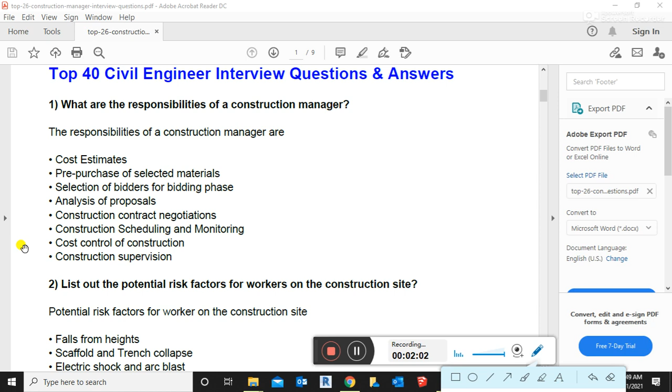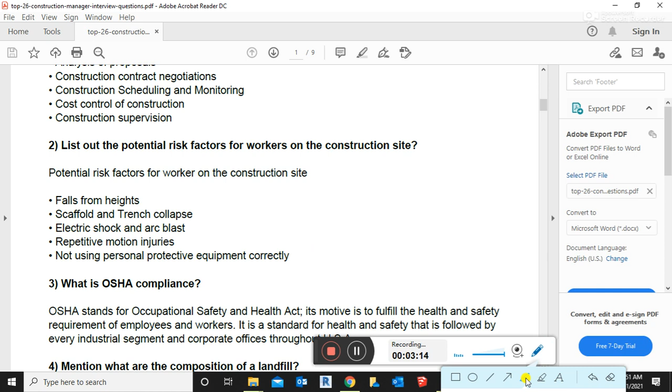Question number 2, guys: list out the potential risk factors for workers on the construction site. Potential risk factors for workers on site: falls from height, scaffolding and trench collapse. Sometimes scaffolding is made for plastering, second floor brickwork, or casting of slabs on walls above 3 meters. We just arrange some scaffolding - if it is not safe, then it is a major risk. Electrical shock and arc blast, repetitive motion injuries, not using personal protective equipment correctly - also called PPE, personal protective equipment. This is very important in the civil industry, construction industry, guys.

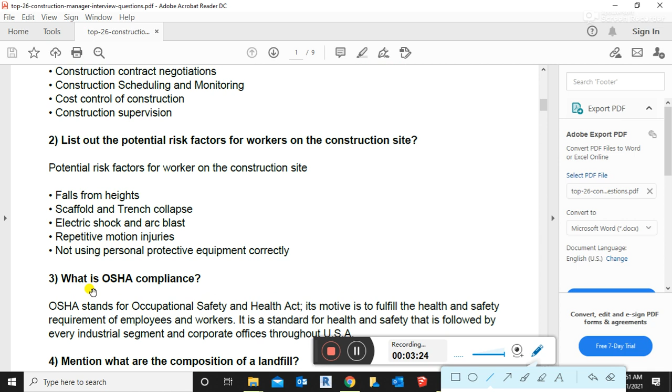Third question: what is OSHA compliance? OSHA stands for Occupational Safety and Health Act. This is very important - we should know the full form of these words. OSHA stands for Occupational Safety and Health Act. Its motive is to fulfill the health and safety requirements of employees and workers. It is a standard for health and safety that is followed by every industry segment and corporate office throughout the USA.

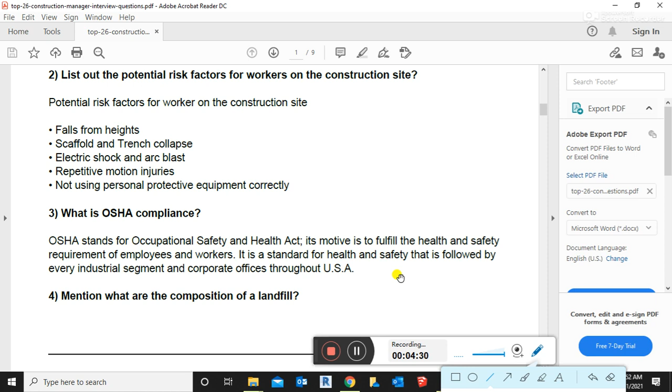Guys, I also faced the same question in the exam, an interview question about OSHA. The hiring manager and construction manager all asked me about OSHA - what do you know about OSHA, Occupational Safety and Health Act? We should know some words, some sentences about this. This is an important question, guys.

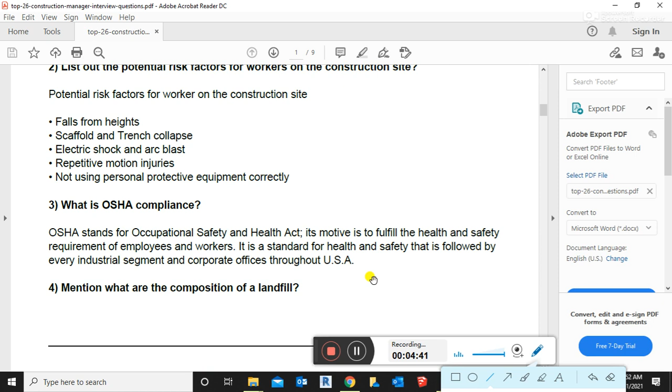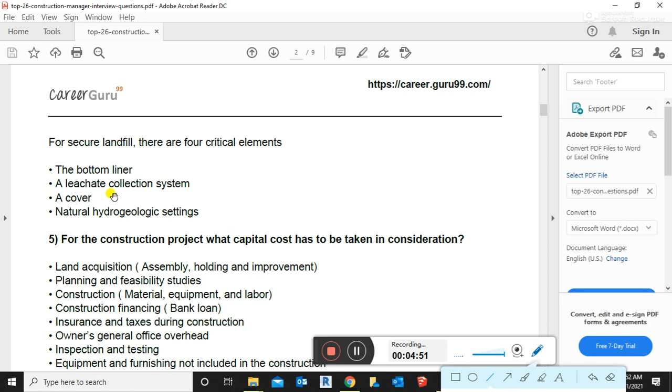Question number 4: mention what are the composition of the landfill. For a secure landfill, there are 4 critical elements: the bottom liner, the leachate collection system, a cover, and a natural hydrogeologic setting.

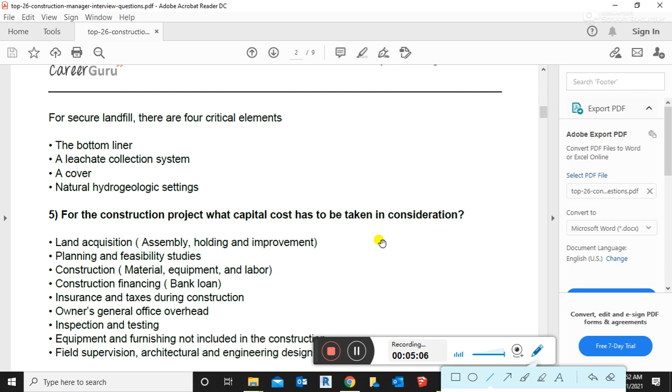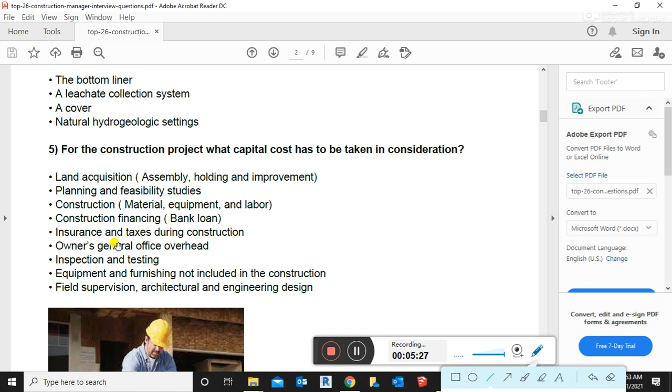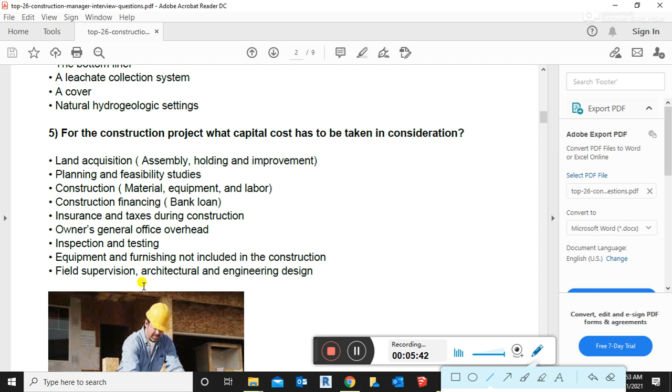Question number 5: for the construction project, what capital costs have to be taken into consideration? Capital cost includes: land acquisition, assembly, holding and improvement, planning and feasibility studies, construction material, equipment and labor, construction financing, bank loan, insurance and taxes during construction, owner's general office overhead, inspection and testing, equipment and furnishing not included in construction, field supervision, architectural and engineering design. These are the factors, guys.

Question number 6: list out some of the software used in the construction sector to estimate cost and monitor expenses. Guys, believe me, I also faced this question in the exam. Every civil engineer should know these types of questions - these are very basic questions. Every civil engineer should know these questions. This is very important, most important question.

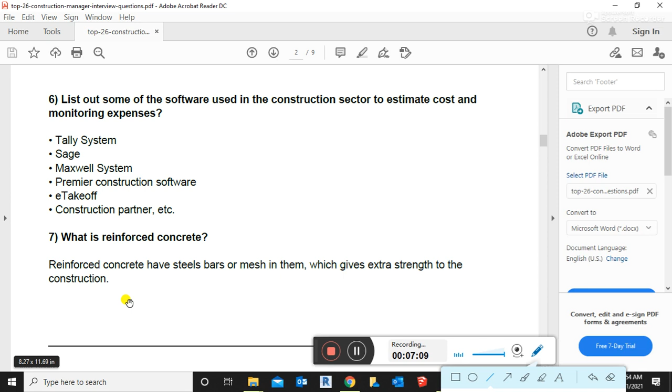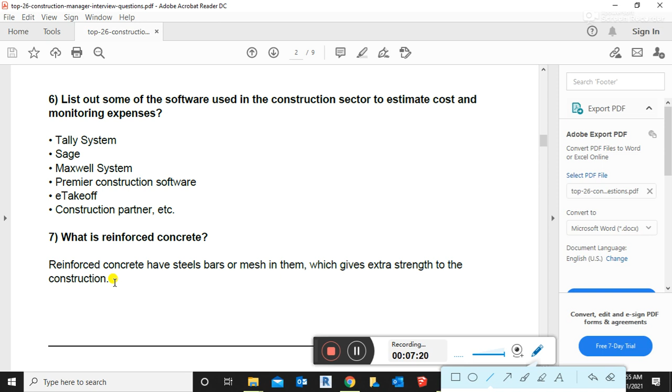What is reinforced concrete? This is a most important question, guys. Reinforced concrete has steel bars or mesh which gives extra strength to the construction. Concrete is most strong in compressive strength, but steel is mostly strong in tension. Guys, most important question - concrete has compressive strength and steel has tension strength.

Next question: what are the different types of foundation? There are 3 main types of foundation. Basement: it is prepared first on top of which the building is constructed. Crawl space: a raised foundation built above the ground, allowing enough space to crawl underneath. Slab foundation: concrete is directly poured into a pit made in the ground. These are the 3 main types of foundation.

Explain what is a hybrid foundation. This is also a very frequently asked question in interviews and written exams, guys.

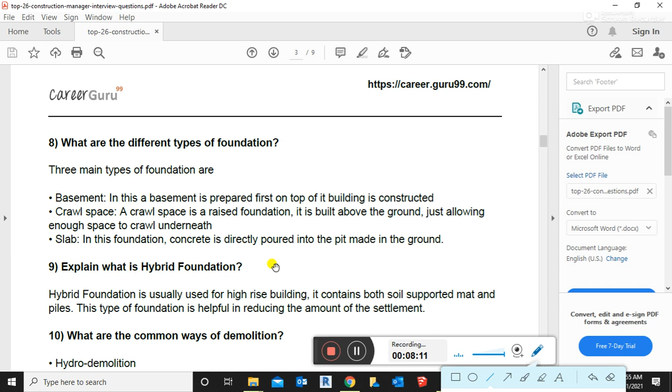Hybrid foundation is usually used for high-rise buildings. It contains both soil-supported mat and piles. This type of foundation is helpful in reducing the amount of settlement.

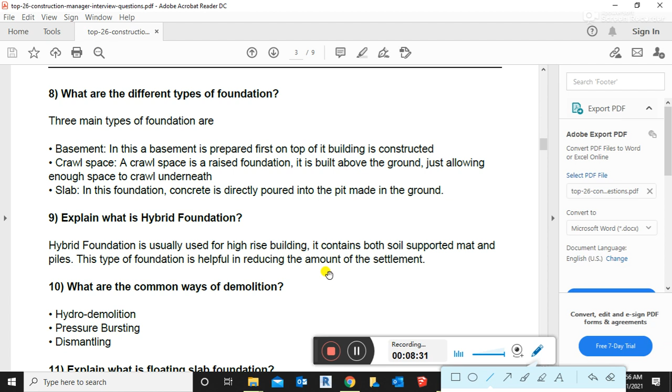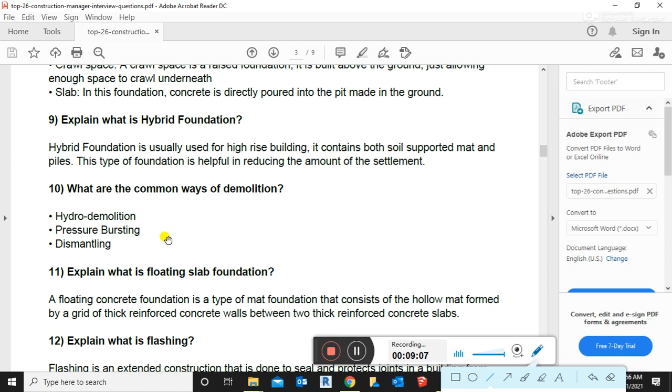Number 10. What are the common ways of demolition? Hydro demolition, pressure bursting, dismantling. For demolition or dismantling, it's a technique to destroy a building, high-rise building, or any type of construction elements. There are 3 types of demolition: hydro demolition, pressure bursting, and dismantling. These are the 3 types of demolition, guys.

Explain what is the floating slab foundation. A floating concrete foundation is a type of mat foundation that consists of a hollow mat formed by a grid of thick reinforced concrete walls between two thick reinforced concrete slabs.

Explain what is flashing. Flashing is an extended construction done to seal and protect the joints in the building from water penetration. Flashing is installed at the intersecting roofs, walls, and parapets.

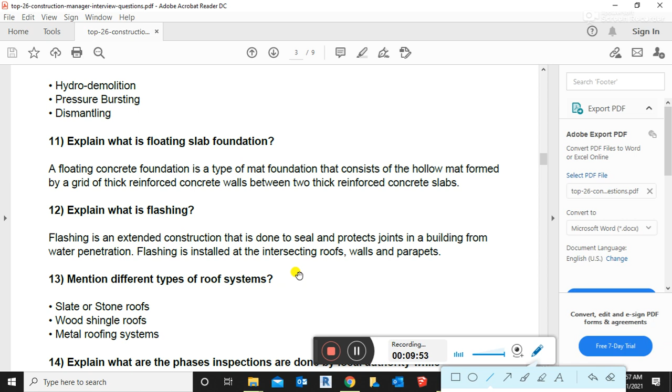13. Mention different types of roof systems: slate or stone roof, wood shingle roof, metal roofing system. These are the three types of roofing, guys.

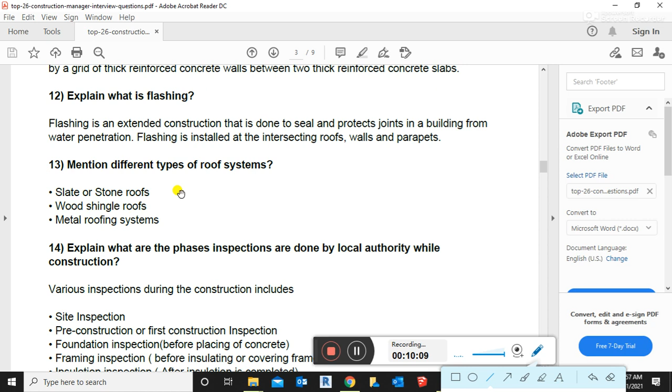Most important question. Explain what phases of inspection are done by the local authority during construction. Various inspections during construction include site inspection. This is also a very important question, guys. Site inspection, pre-construction or first construction inspection, foundation inspection before placing of concrete, framing inspection before insulating or covering frame, and insulation inspection after insulation is completed.

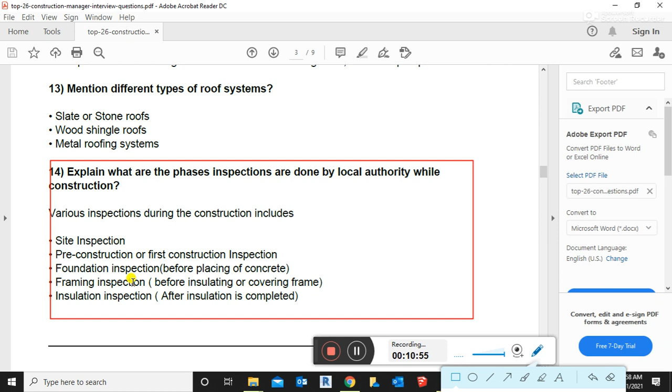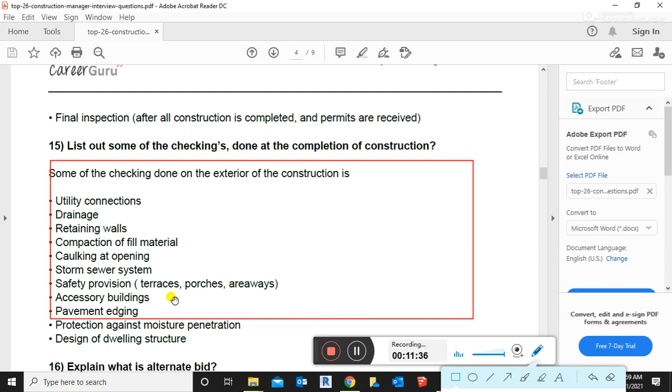Question number 15. List out some of the checking done after completion of construction. Some of the checking done on the exterior of the construction includes utility connection, drainage connection, retaining wall, compaction of fill materials, caulking at the openings, storm sewer system, safety provisions, accessory buildings and pavement edging, and protection against moisture penetration, design of the dwelling structure.

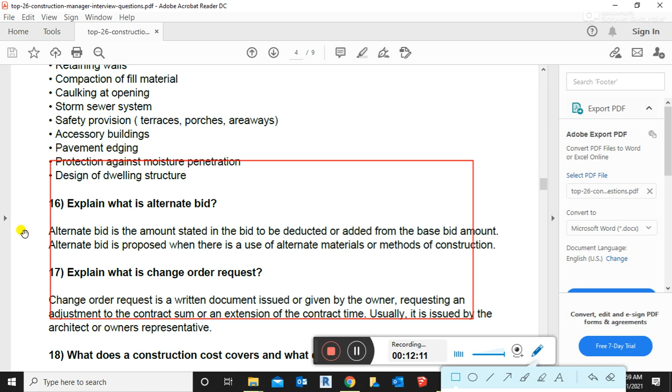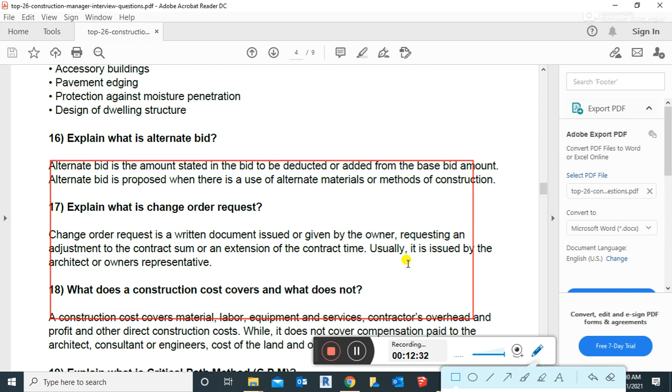Question number 17. Explain what is a change order request. Change order request is the written document issued or given by the owner requesting an adjustment to the contract sum or extension of the contract time. Usually it is issued by the architect or owner representative.

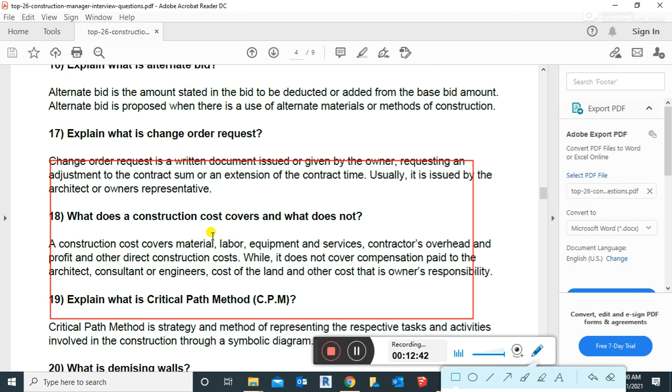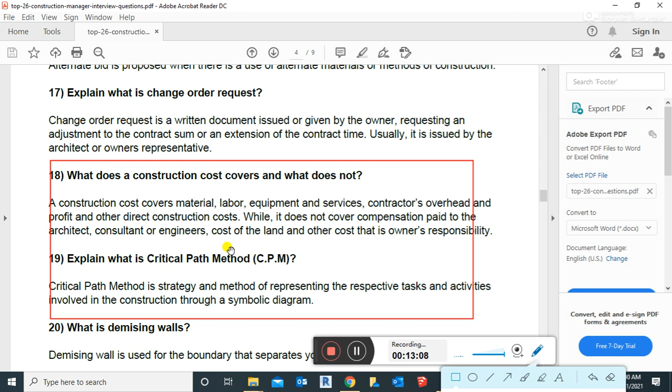What does construction cost cover and what does not? Construction cost covers materials, labor, equipment and services, contractor's overhead and profit, and other direct construction costs. It does not cover compensation paid to the architect, consultant, or engineers, cost of the land, and other costs that are the owner's responsibilities. Guys, this is a most important question.

19. Explain what is the critical path method, or CPM. This is a very important question. As a project manager or construction manager, we should know this. Critical path method is a strategy and method of representing the respective tasks and activities involved in construction through symbols and diagrams.

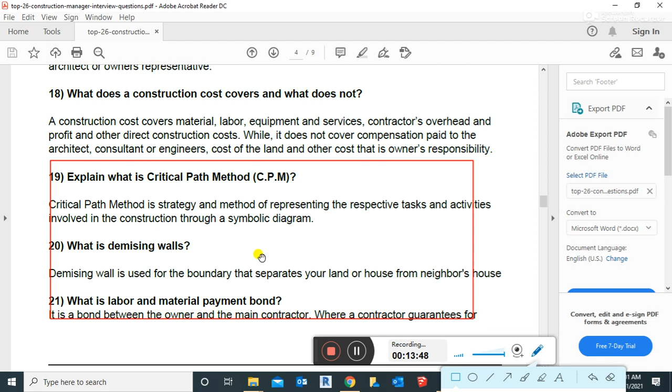What is the demising wall? The demising wall is used for the boundary that separates your land or house from the neighbor's house, called the demising wall.

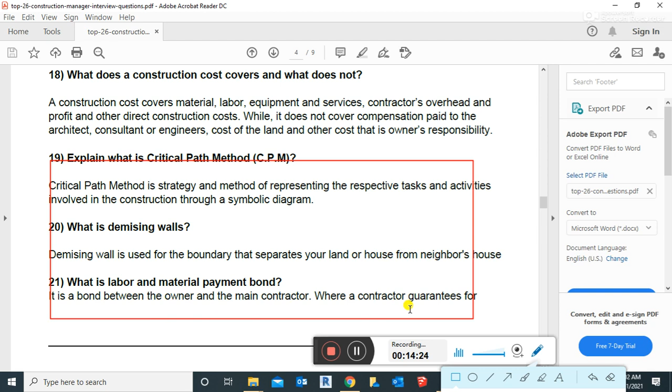Explain what is the structural frame or system. Structural frames are the load-bearing system assembly of beams and columns on the foundation. Normally, the columns and beams are generally prefabricated off-site and assembled on-site. Some of the elements of the building are prefabricated; once it comes to the site, then it's assembled on-site.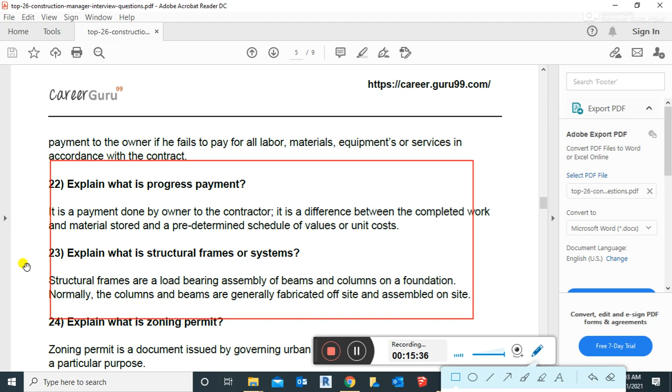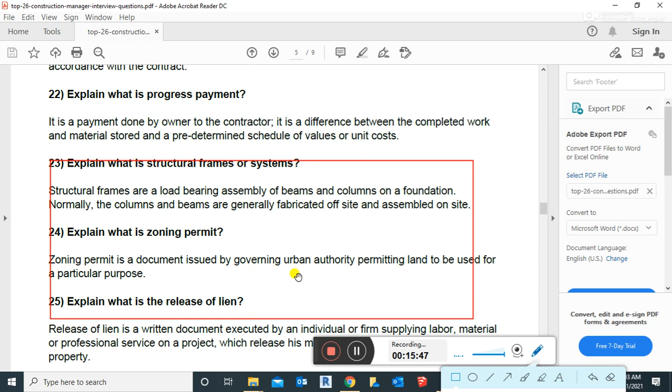Explain what is a zoning permit. A zoning permit is a document issued by a governing urban authority permitting land to be used for a particular purpose.

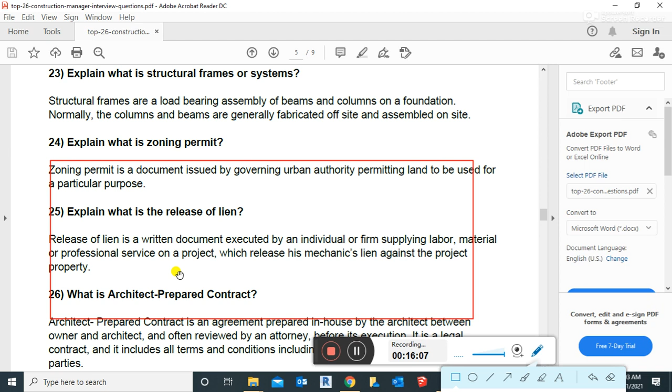Explain what is release of lien. A release of lien is a written document executed by the individual or firm supplying labor, material, or professional services on a project, which releases his mechanic's lien against the project property.

What is an architect-prepared contract? It is an agreement prepared in house by the architect between owner and architect, often reviewed by an attorney before execution. It is a legal contract, and it includes all terms and conditions including adequate legal protection for both parties.

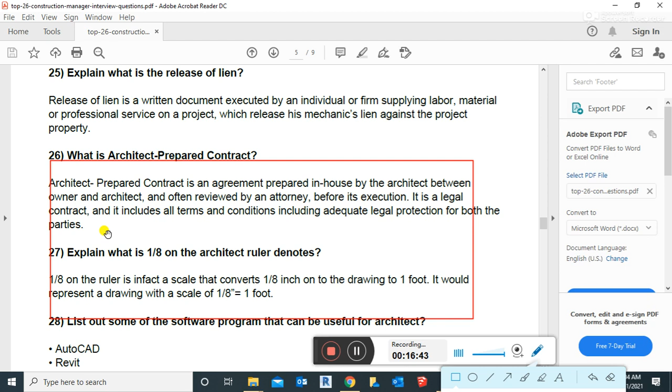Explain what the 1/8 scale on the architect ruler denotes. The 1/8 on the ruler is a scale that converts 1/8 inch on the drawing to 1 foot. So 1/8 would represent a drawing with a scale of 1/8 inch equal to 1 foot.

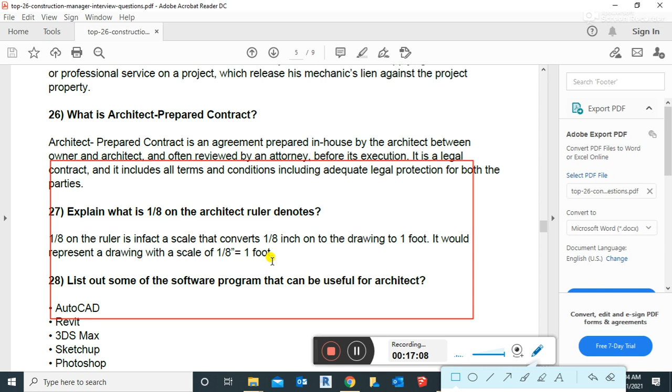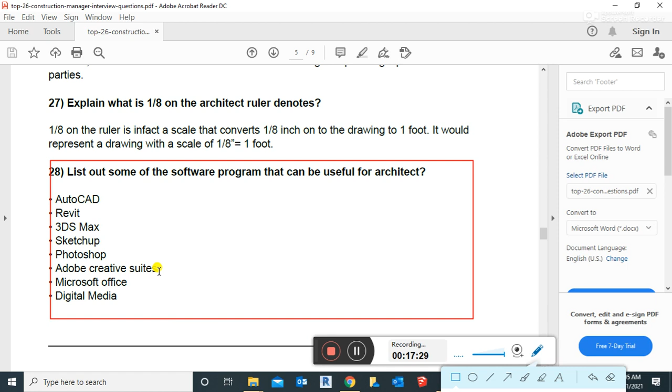List out some of the software programs that can be used for architecture. This is a most important question: AutoCAD, Revit, 3DS Max, SketchUp Pro, Photoshop, Adobe Creative Suite, Microsoft Office, digital media.

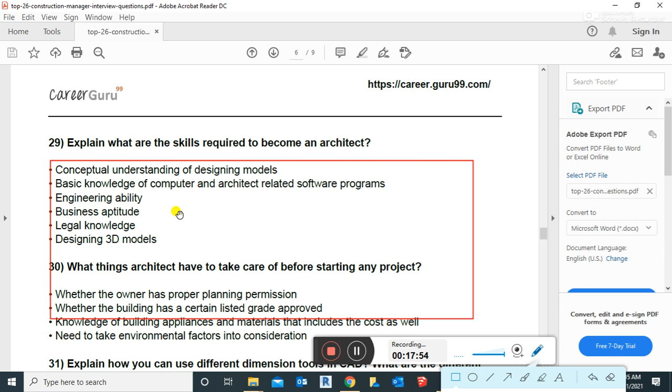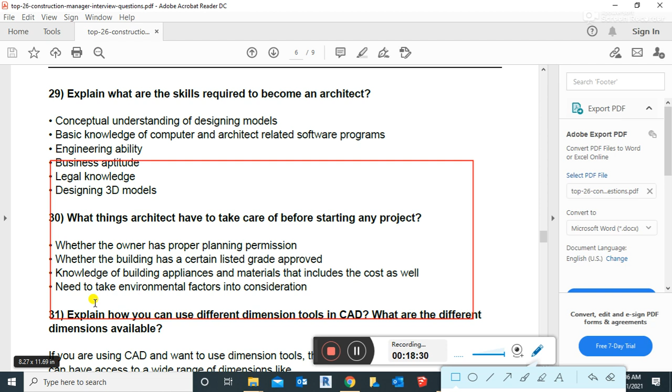Explain what skills are required to become an architect. This is also a most important question. Conceptual understanding of designing models, basic knowledge of computer and architecture related software programs, engineering ability, business aptitude, legal knowledge, designing 3D models. What things does an architect have to take care of before starting any project? Whether the owner has proper planning permission, whether the building has a certain listed grade approved, knowledge of building appliances and materials that includes the cost as well, and also need to take environmental factors into consideration.

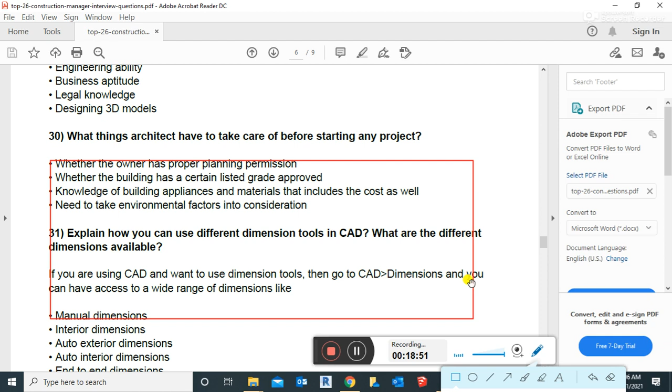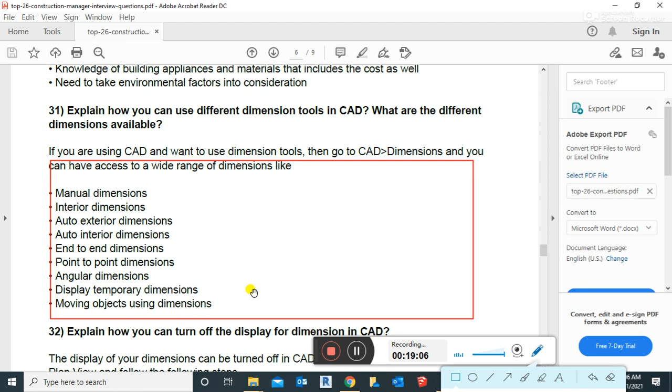Explain how you can use different dimension tools. In CAD, what are the different dimensions available? If you are using CAD and want to use dimension tools, you can access a wide range of dimensions like manual dimension, interior dimension, auto exterior dimension, auto interior dimension, end-to-end dimension, point-to-point dimension, angular dimension, display temporary dimension, and moving objects using dimension.

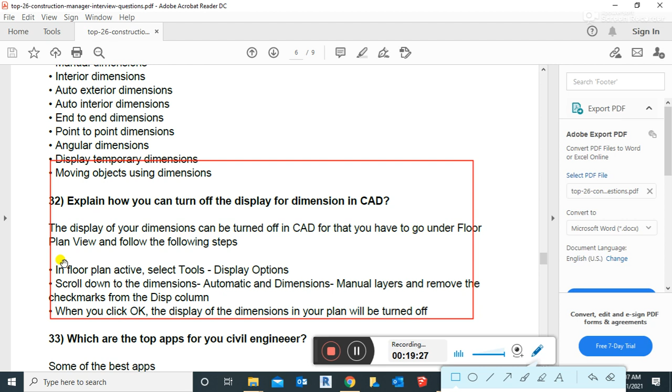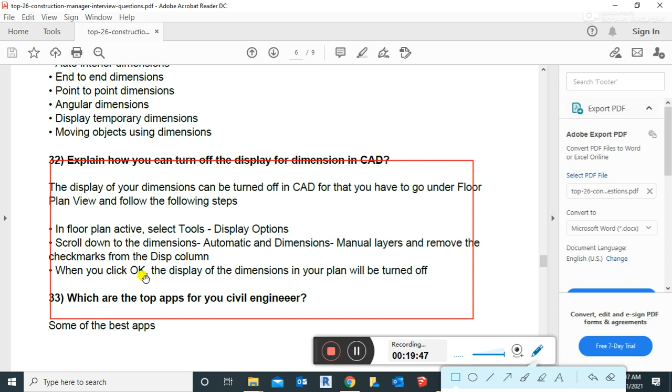Explain how you can turn off the display for dimensions in CAD. The display for your dimension can be turned off in CAD. For that, you have to go under floor plan view and follow these steps: in floor plan active, select Tools, Display Options, scroll down to Dimensions - Automatic and Dimensions - Manual layers, and remove the check marks from the display column. When you click OK, the display of the dimension will turn off.

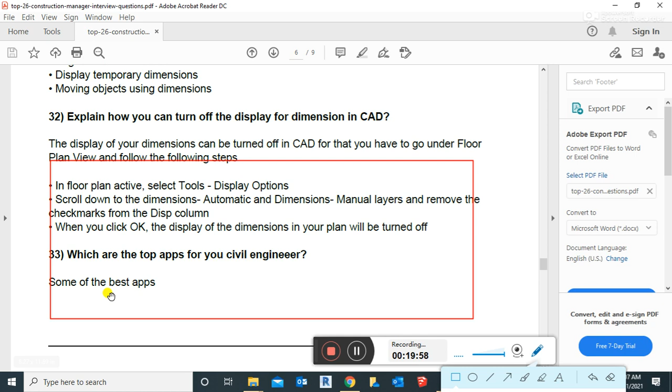Which are the top apps for civil engineering? Some of the best apps are Dropbox, Instagram, SketchUp, Sketchbook, Photoshop Express, Flipboard, Magic Plan, Houzz, and AutoCAD.

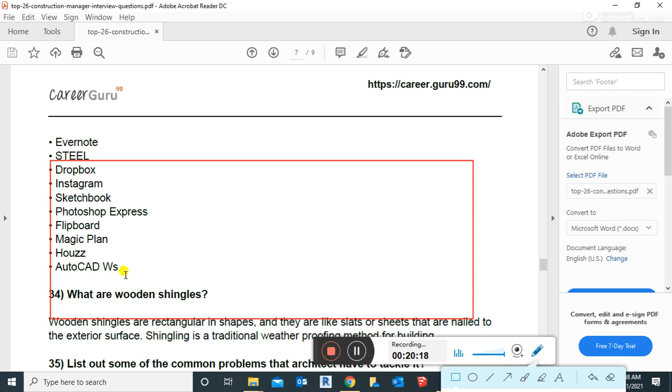What are wooden shingles? Wooden shingles are rectangular in shape, like slats or sheets that are nailed to the exterior surface. Shingling is a traditional weather-proofing method for buildings.

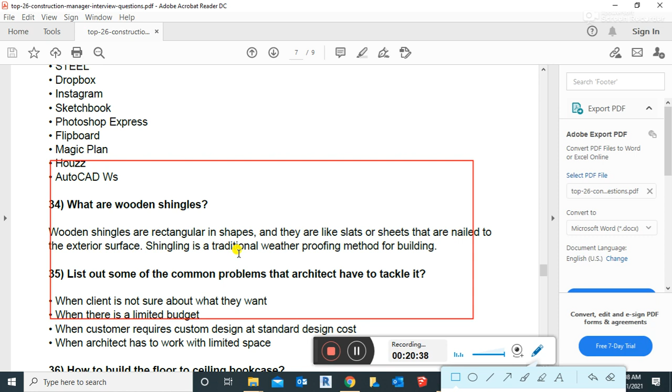List some of the common problems architects have to deal with: when the client is not sure about what they want, when there is a limited budget, when a customer requires a custom design at standard design cost, and when the architect has to work with a limited space.

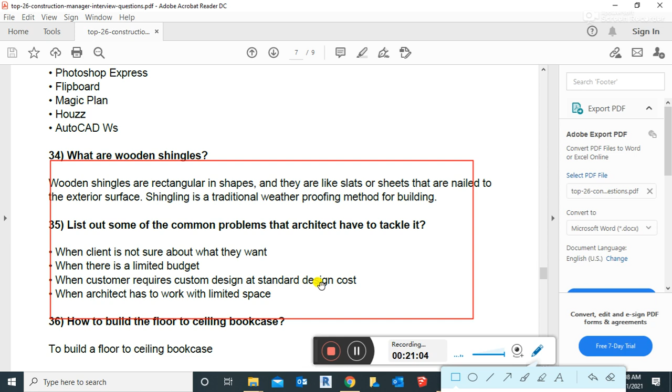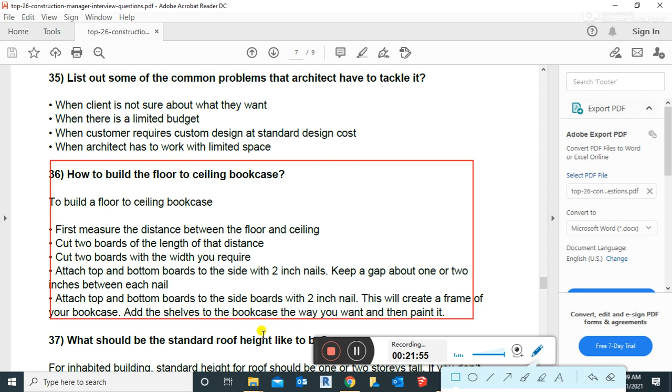How to build a floor to ceiling bookcase: first measure the distance between the floor and ceiling. Cut two boards of the length of that distance. Cut two boards with the width you require. Attach top and bottom boards to the sides with 2 inch nails, keeping a gap of about 1 to 2 inches between each nail. Attach the top and bottom boards to the side boards with 2 inch nails. This will create a frame for your bookcase, and then add the shelves and paint the bookcase as you want.

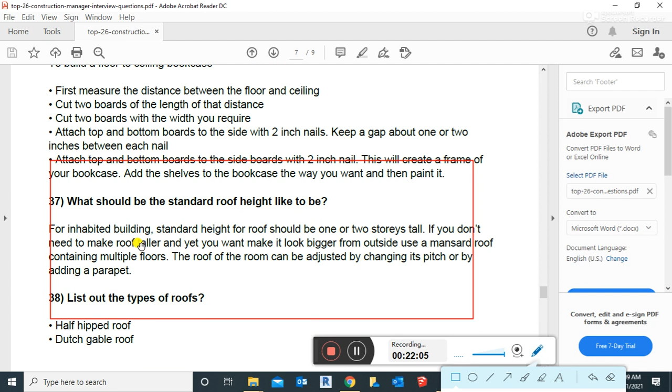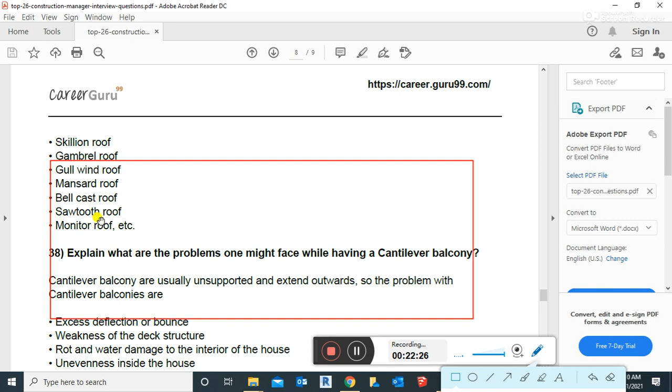What should the standard roofing height be? List the types of roof: half hipped roof, Dutch gable roof, skillion roof, gambrel roof, gull wind roof, mansard roof, bell cast roof, sawtooth roof, and monitor roof.

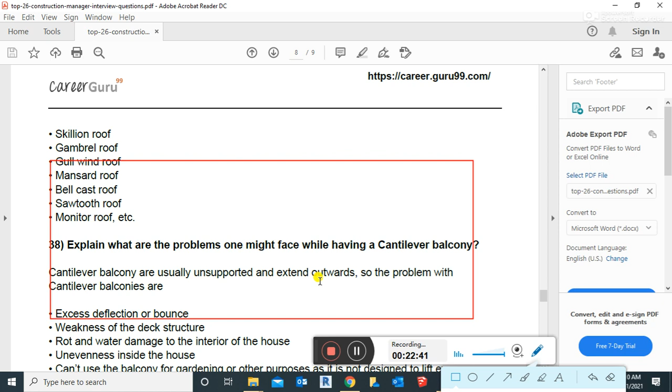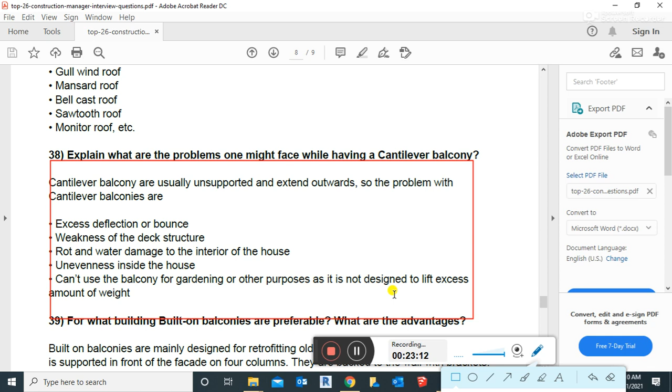Explain what problems one might face while having a cantilever balcony. Cantilever balconies are usually unsupported and extended outward, so the problems include excess deflection or bounce, weakness in the deck structure, rot and water damage to the interior of the house, unevenness inside the house, inability to use the balcony for gardening or other purposes, and not being designed to lift excess amounts of weight.

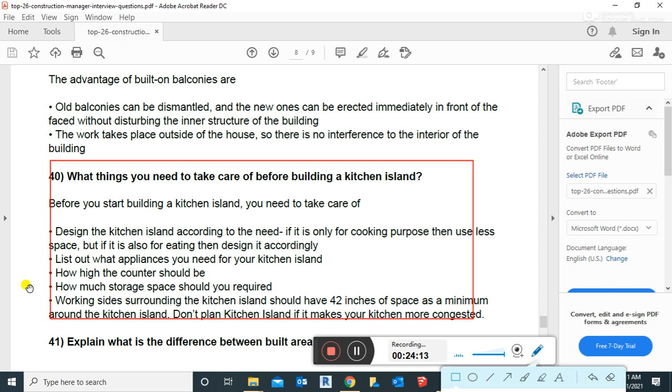What things do you need to take care of before building a kitchen island? You need to design the kitchen according to the need. If it is only for cooking purposes, it needs less space, but if it is also for eating, design it accordingly. List out what appliances you need for the kitchen, how high the counter should be, and how much storage space you require. Working sides surrounding the kitchen should have a minimum of 42 inches of space around the kitchen. Do not plan the kitchen in a way that makes it more congested.